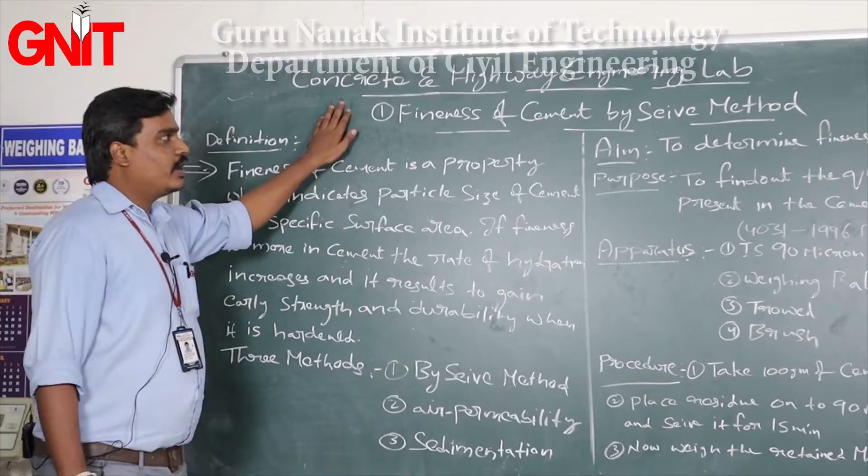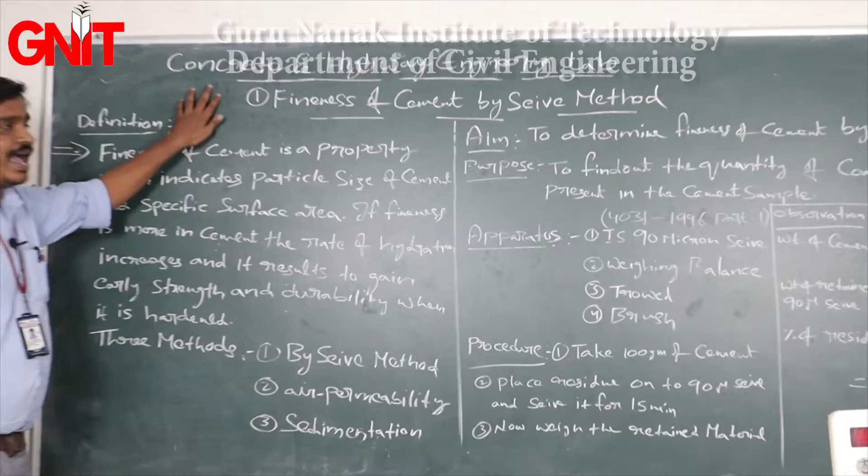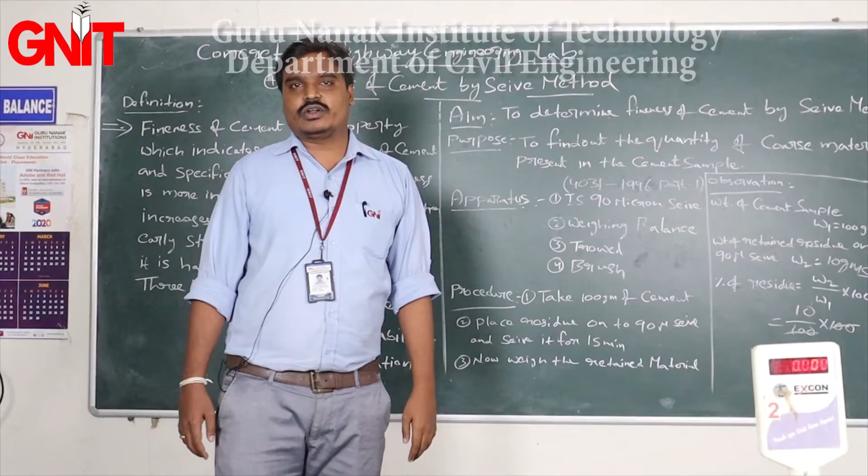Concrete and Highway Engineering Lab gives information about how to find the quality of materials. The building materials are nothing but cement, sand and coarse aggregate. If the properties of the building materials satisfy Indian standards, then those materials can be used in different construction fields.

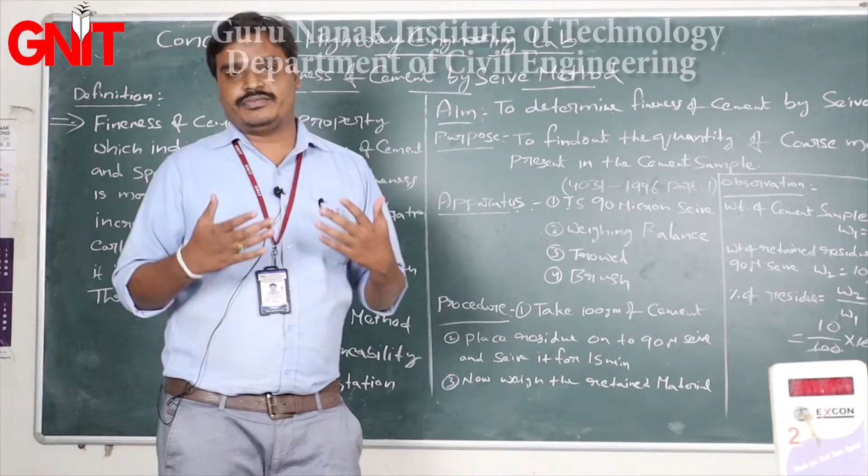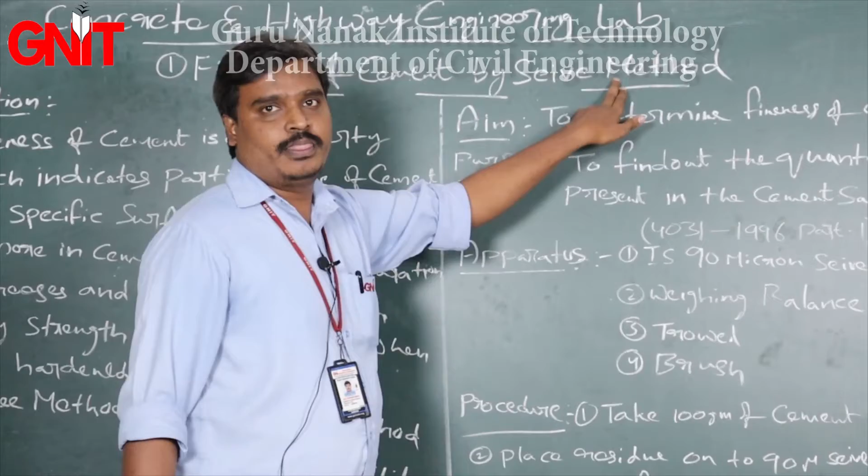Today in this demonstration, I would like to give information about how to determine the fineness of cement using the sieve method. Before starting the procedure, first we need to know what is meant by fineness of the cement.

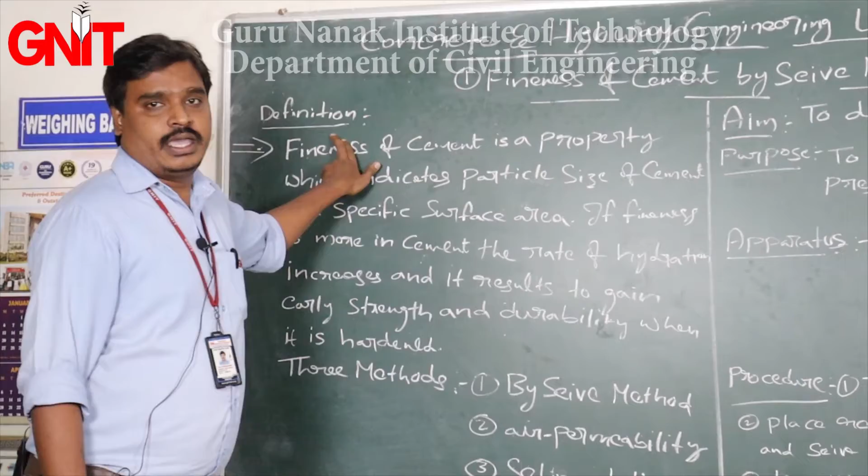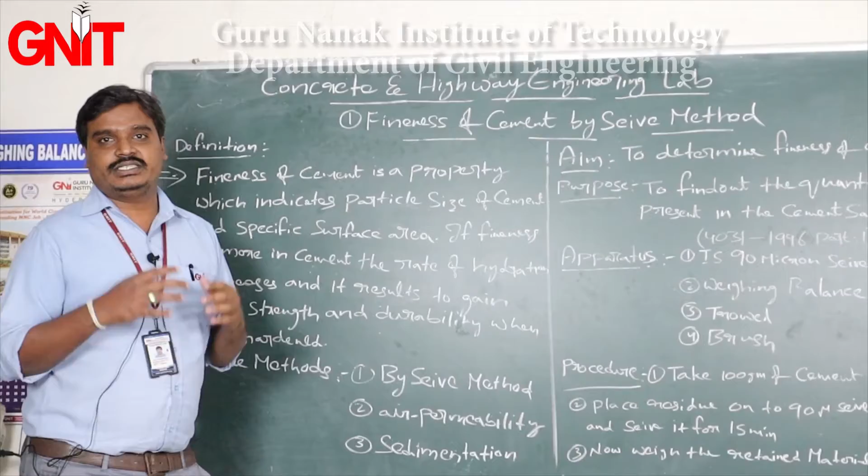Fineness of the cement is a property of the cement which indicates the particle size of the cement. It is expressed in terms of specific surface area of cement. It affects the hydration of the cement, giving early strength, and it decreases the bleeding of the cement when the fineness of the cement is high.

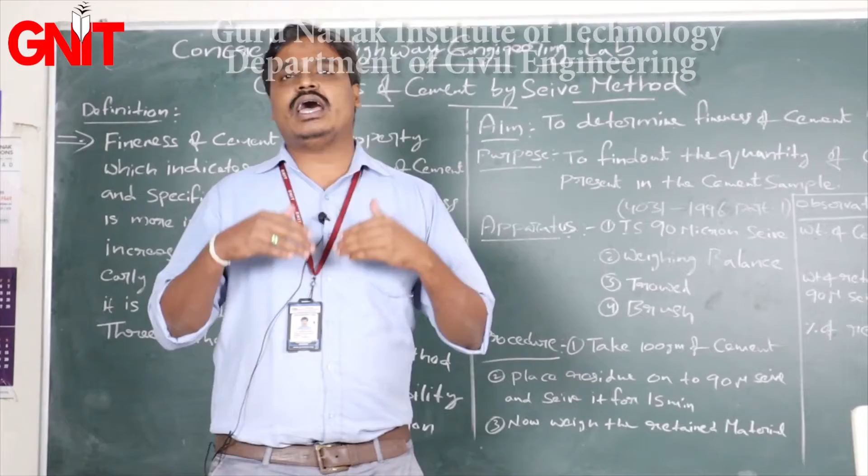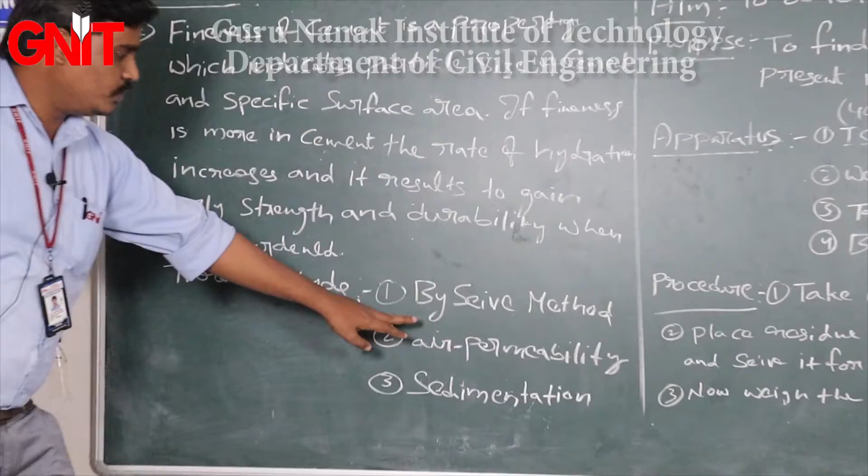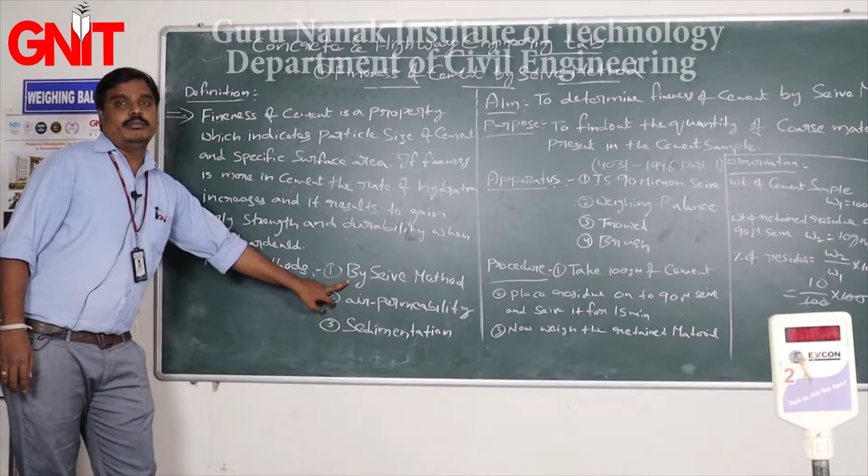According to Indian standards, to define fineness of the cement we have three different methods: the first is the sieve method, the second is the air permeability method, and the third is the sedimentation method. By using the sieve method we can determine the fineness of the cement. By using air permeability and sedimentation methods, we can determine the specific surface area of the cement.

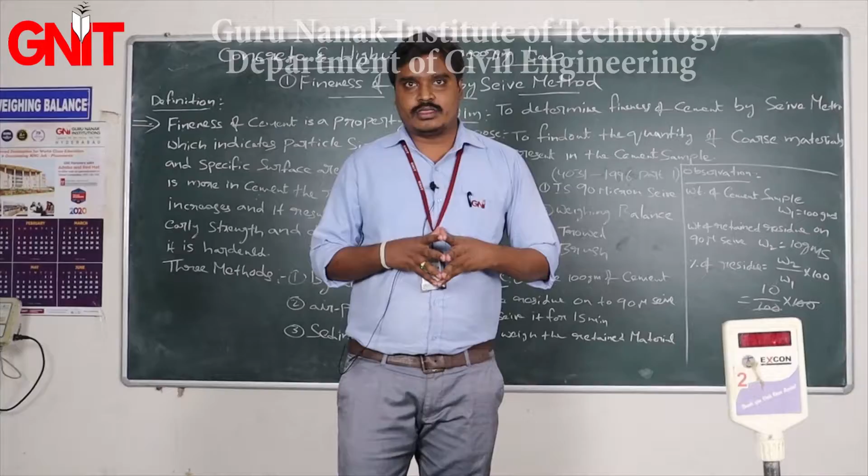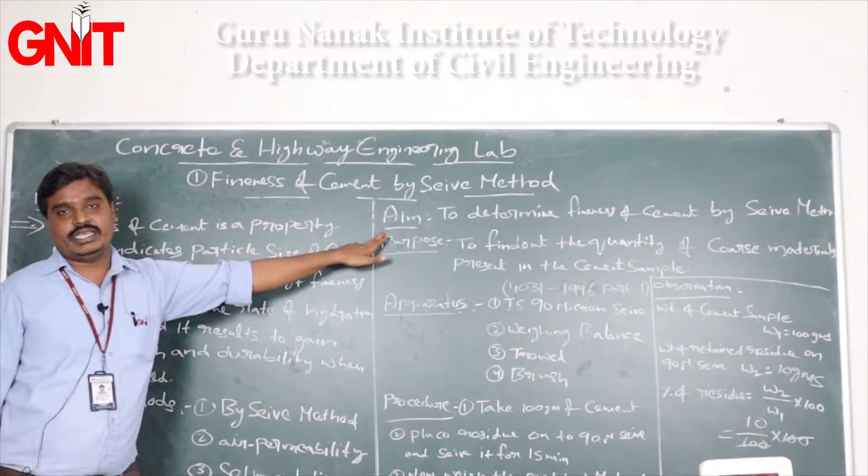In this present lecture, I would like to give information about how to determine the fineness of the cement using the sieve method. Now coming to the aim of this test: we are going to determine the fineness of the cement by using the sieve method.

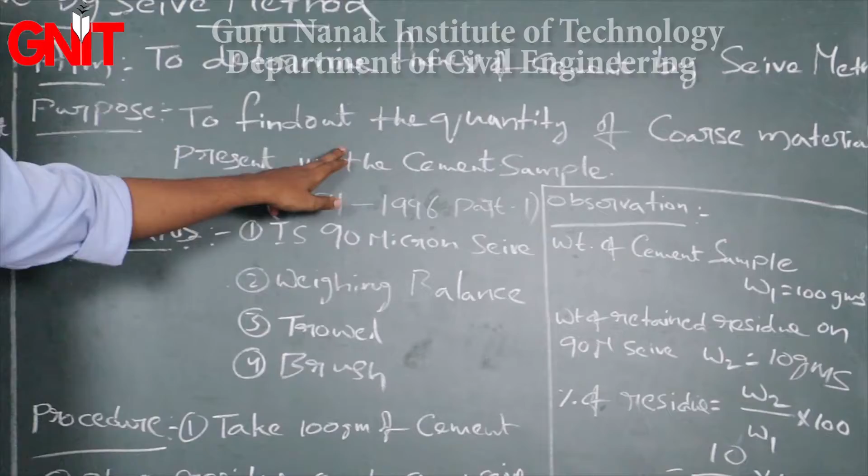What is the main purpose of doing this test? To find out the quantity of the coarse material which is present in the cement sample. Here we are going to find the coarse material which is present in the cement sample.

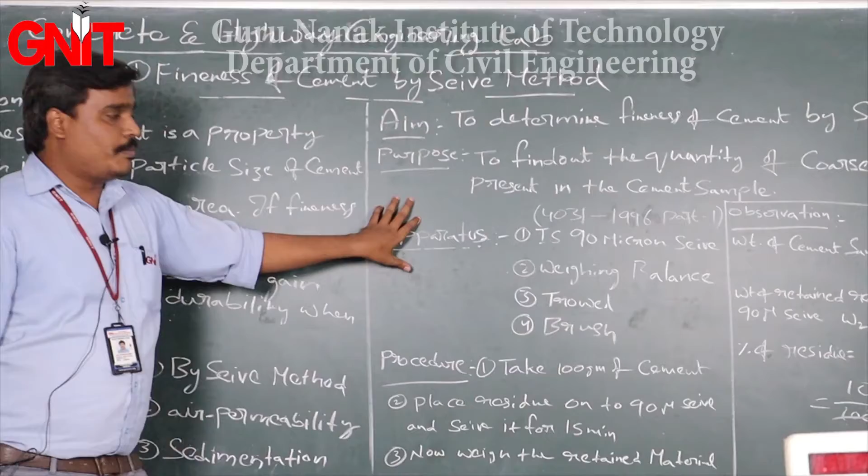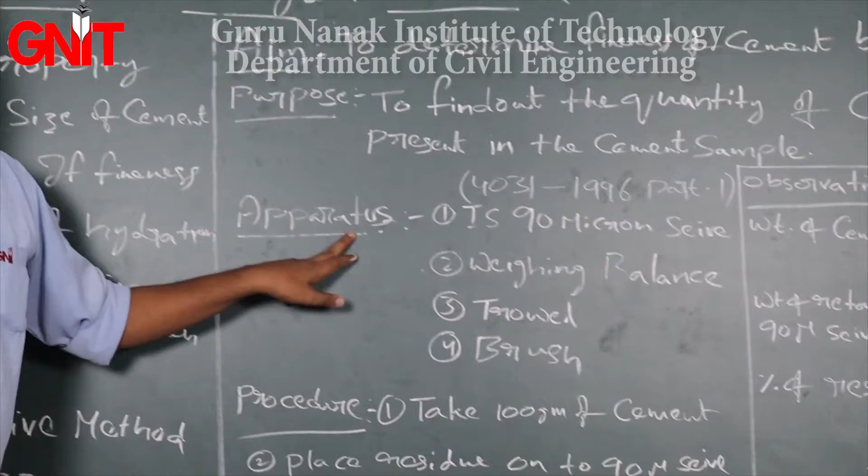Some of the apparatus used to find this fineness of cement, as per reference Indian Standard 4031 1996 Part 1: we need an Indian Standard 90 micron sieve, a weighing balance, and a trowel as well as a brush.

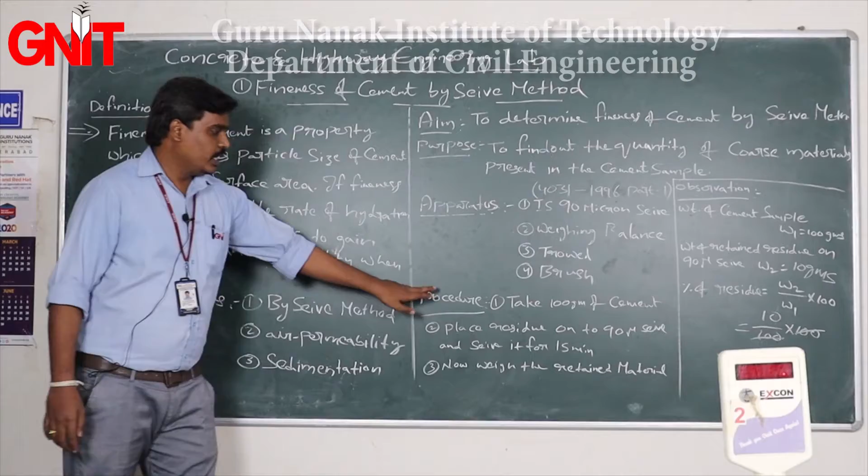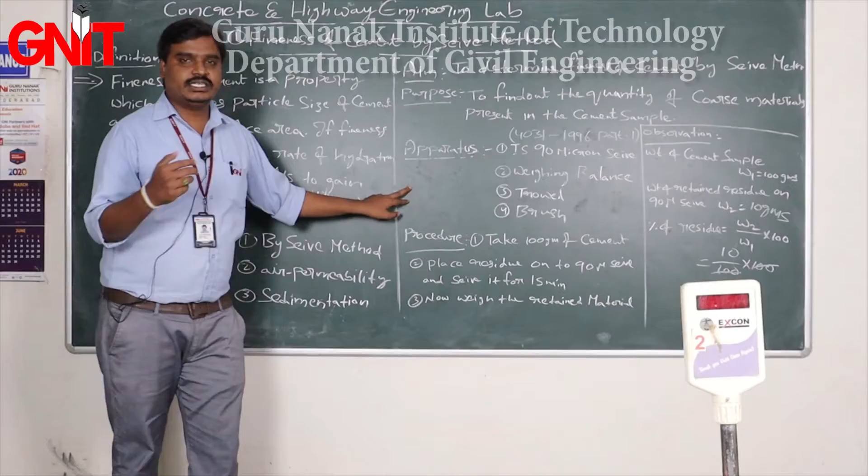Coming to the procedure: first we need to take 100 grams of cement. You can take any different grade of cement like OPC 33, OPC 43, OPC 53 according to availability. In this present procedure, I am taking OPC 53 grade cement.

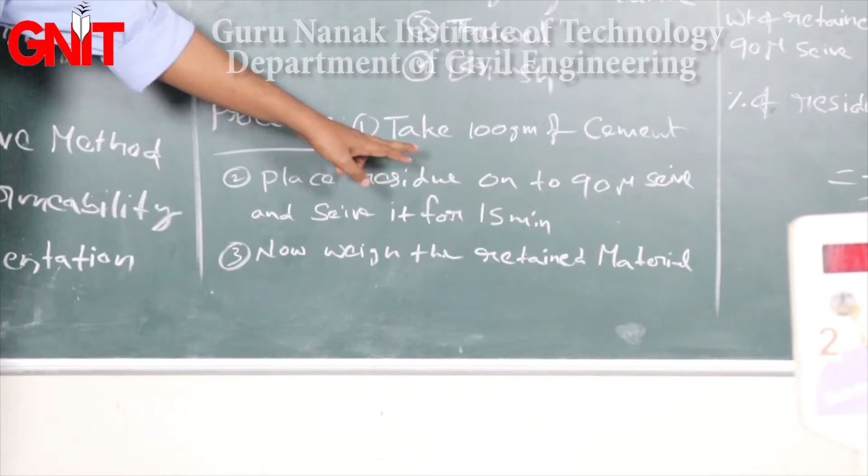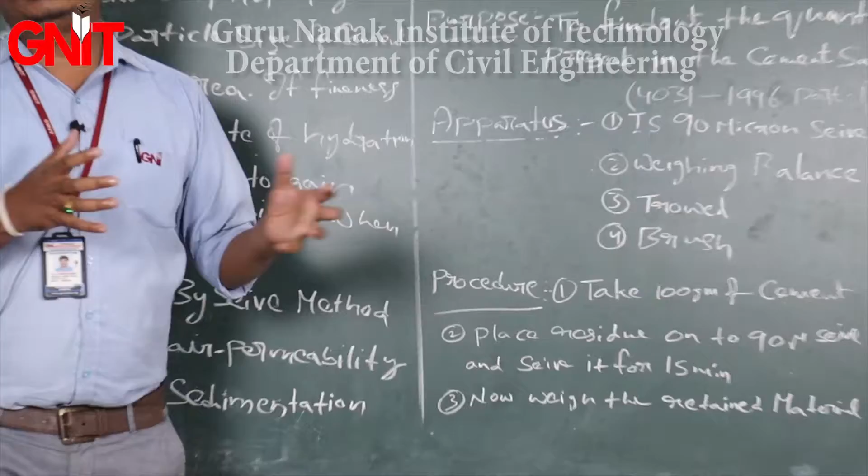After taking 100 grams of cement, that cement should be placed onto the 90 micron sieve. After placing the cement onto the 90 micron sieve, we need to sieve the cement for at least 15 minutes.

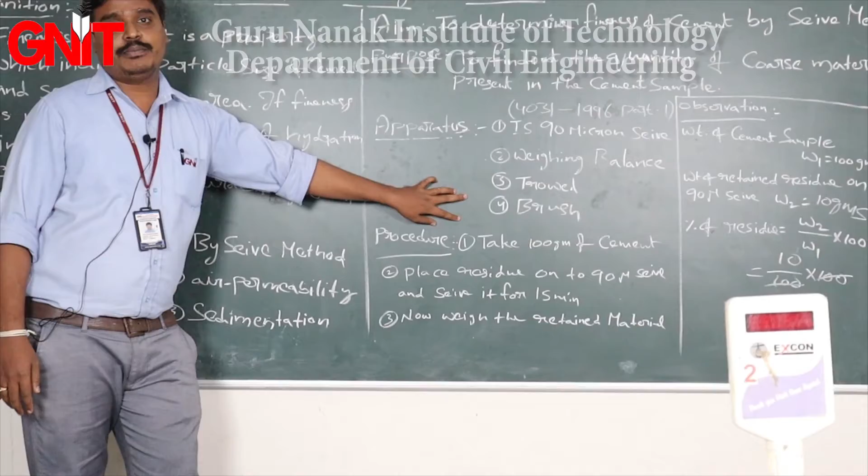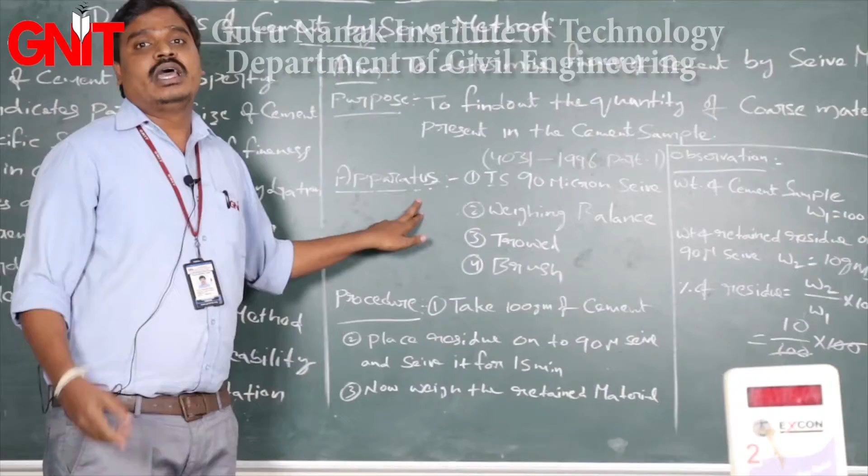After completion of the time period, you can see some changes in the sieve. When the cement particle is greater than 90 microns, that cement will be retained on the 90 micron sieve. If the cement particle is less than 90 microns, it will pass through the 90 micron sieve.

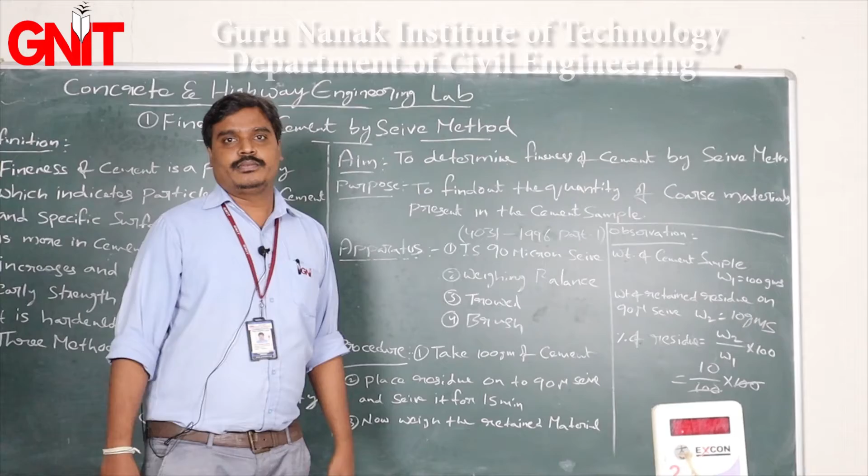Now whatever residue is retained on the 90 micron sieve should be weighed. Then we can calculate the percentage of the coarse retained material.

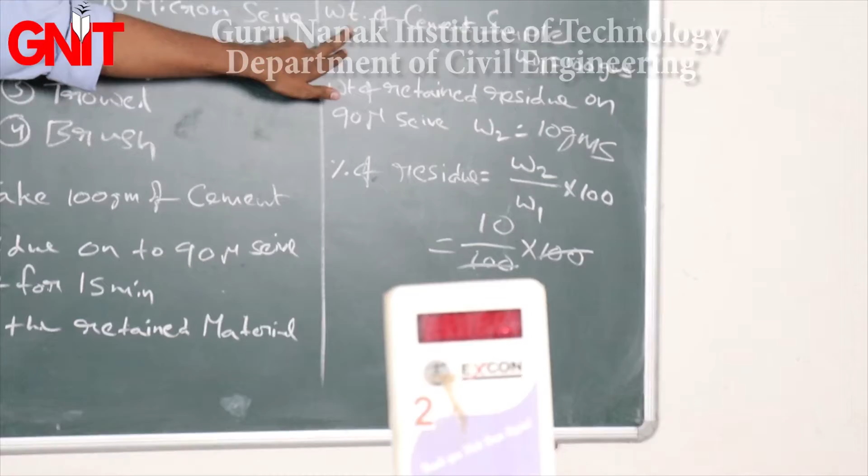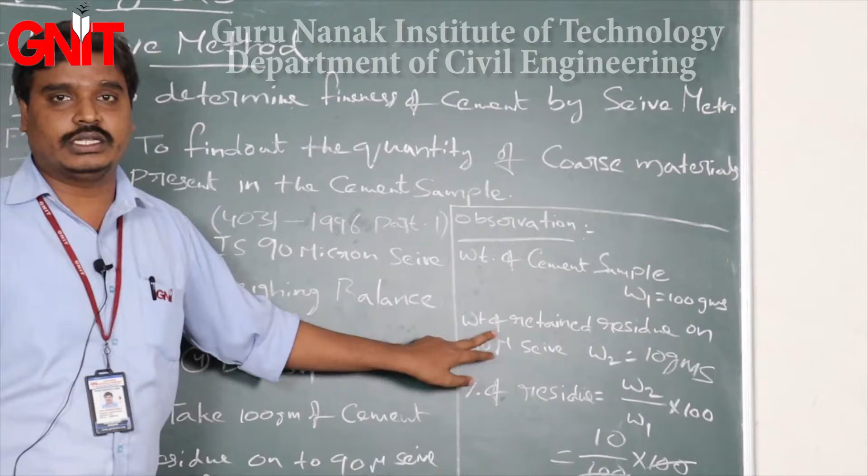Coming to the calculation part, initially we are taking some amount of the cement weight. The weight of the cement sample is 100 grams, which we are naming as W1. Next, after sieving, whatever residue is retained on the 90 micron sieve will be named W2. Here I got some value.

When we go to the practical exposure of the experiment, then you can understand how to calculate the percentage of retained material. Now coming to the practical exposure.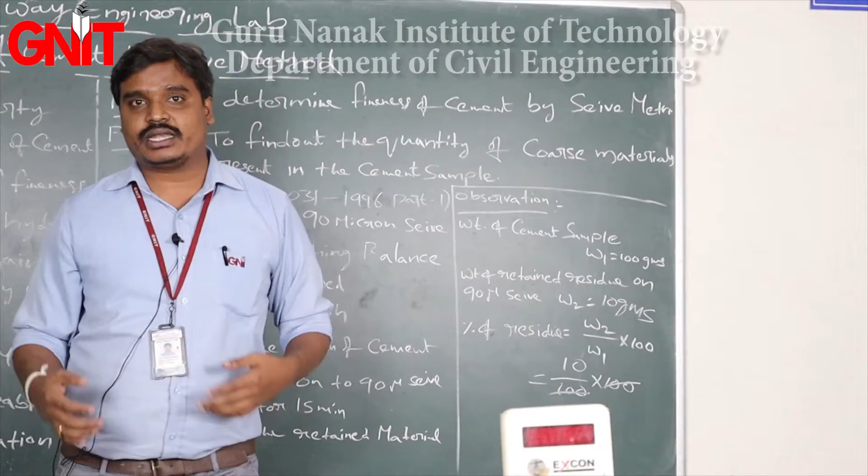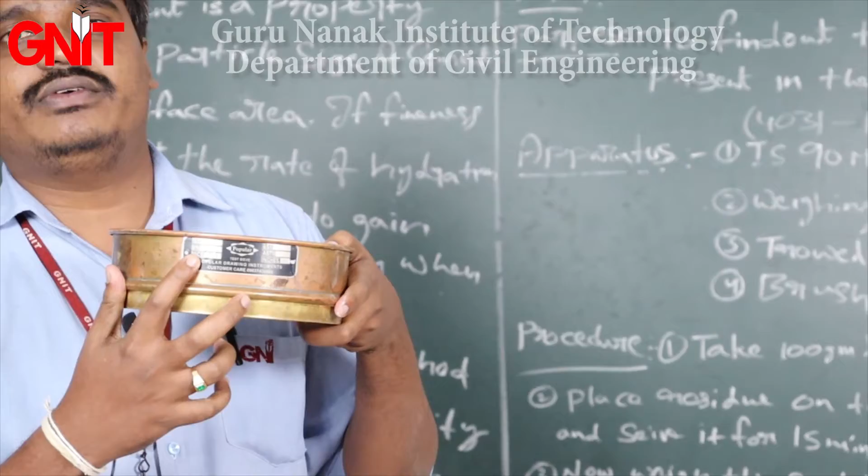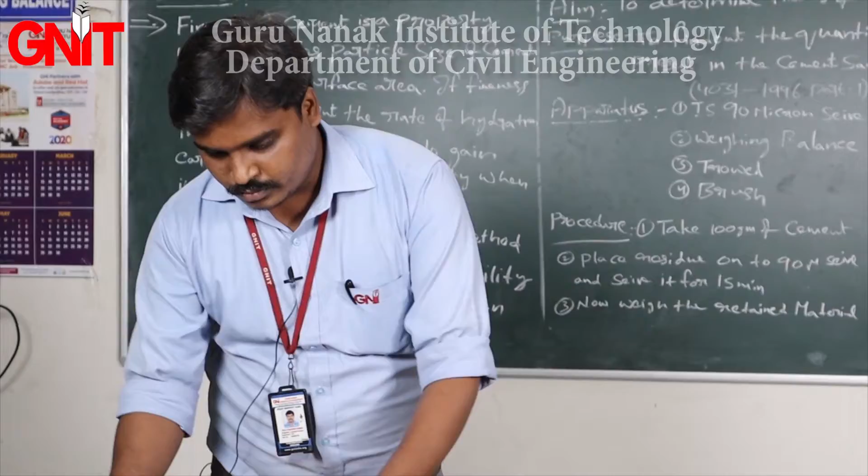This is the 90 micron sieve as a reference with IS 4031 1996 Part 1. Here you can observe the sieve number, sieve number 9, the size of the sieve is 90 micron. This is the top lid, and this is the collecting pan. These are the trowels. This is the weighing balance.

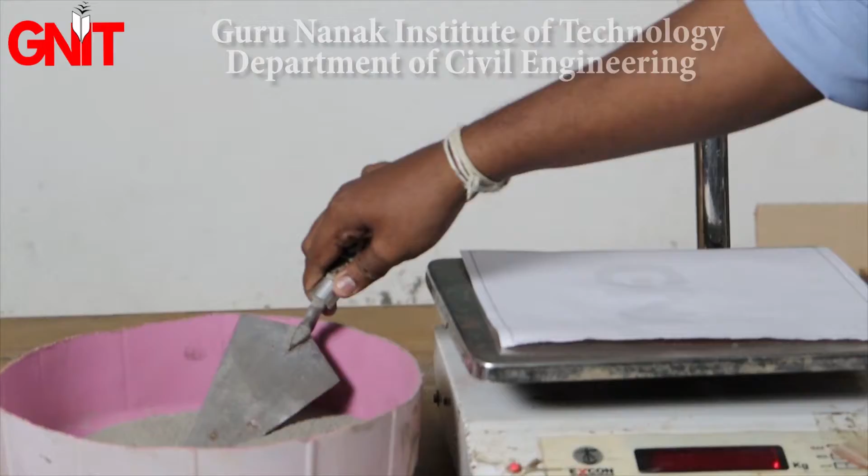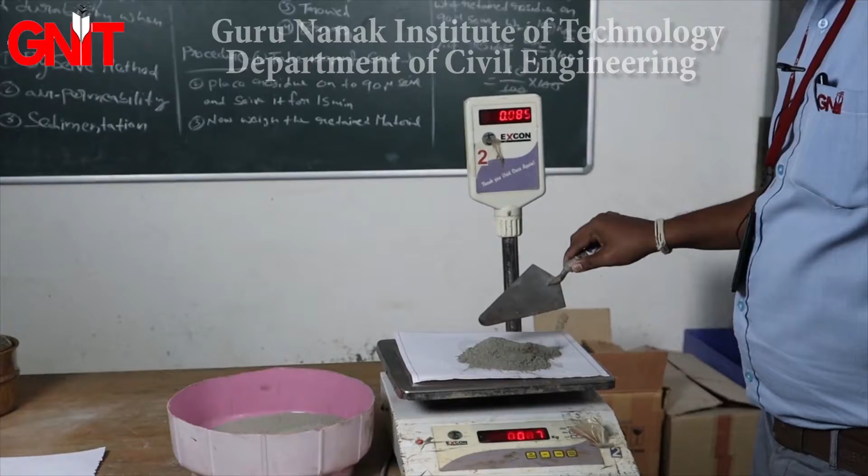Now coming to the procedure, how to determine the fineness of cement: first we need to take 100 grams of cement. Let's take 100 grams of cement. Here you can observe the value is, the weight of the cement is 100 grams.

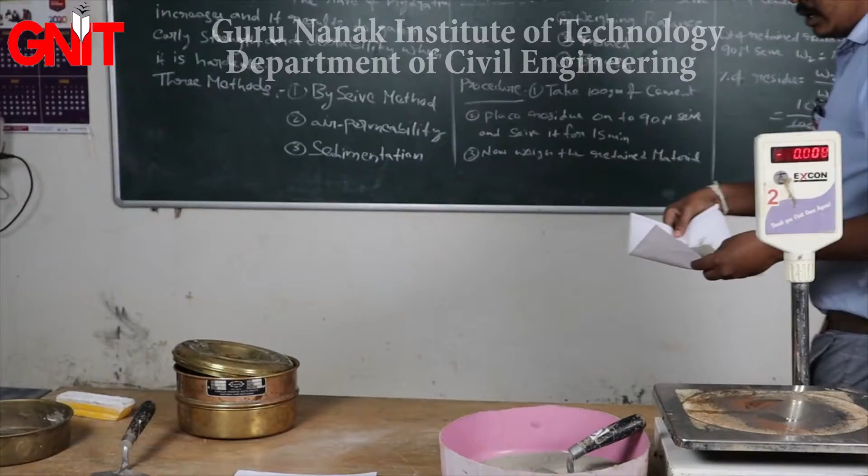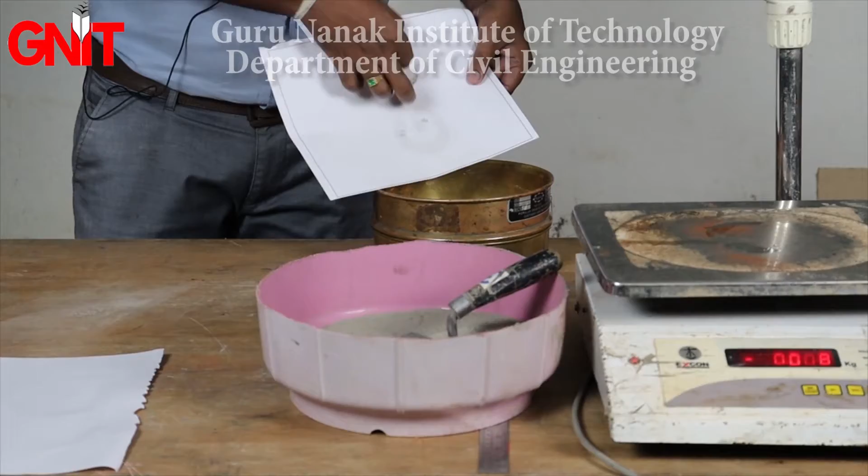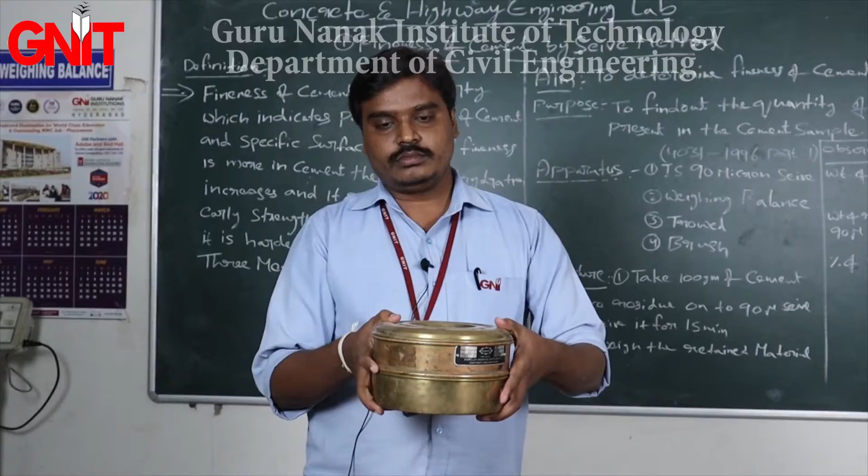Now after taking the 100 grams of cement, this cement should be placed onto the 90 micron sieve. Here you can observe the cement. Now close with the lid. Sieve it for 15 minutes. It should be sieved in a circular motion like this.

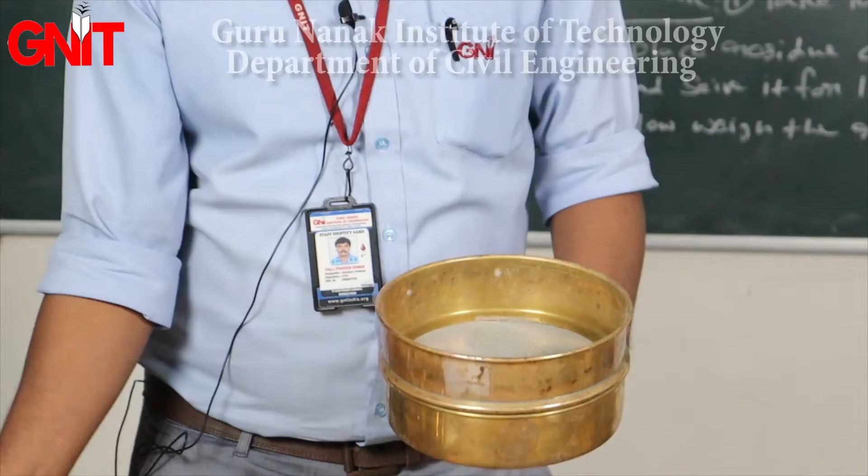Now after completion of the time period, you can stop the sieving. Open the lid and you can observe some changes in the procedure. Now see the changes.

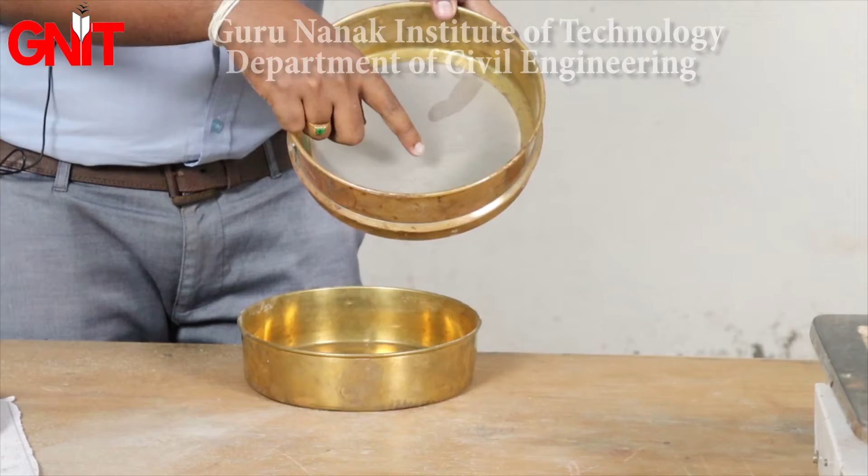If the cement particles are greater than 90 micron, those particles will be retained on the 90 micron sieve. Here you can see some amount of cement particles are retained on the 90 micron sieve. Those will be named as coarse material.

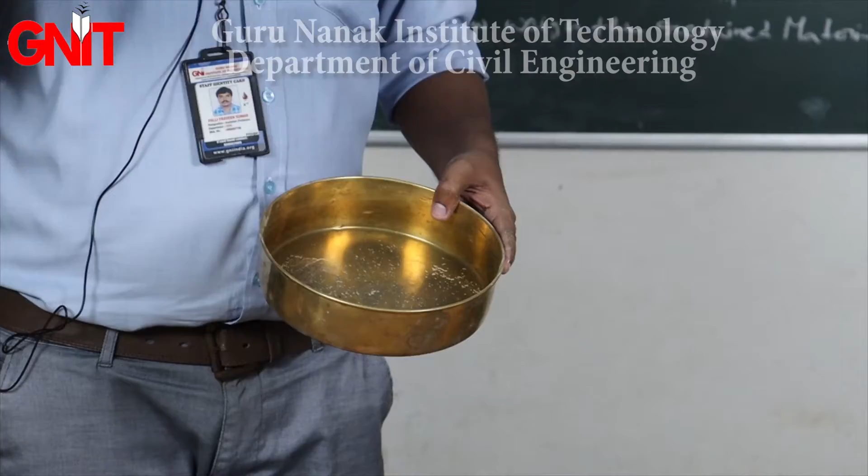If the cement particles are less than 90 micron, they will pass through the 90 micron sieve and we can collect them through the collecting pan. Here you can observe this material will be named as fine material. Now we need to weigh the residue which is retained on the 90 micron sieve.

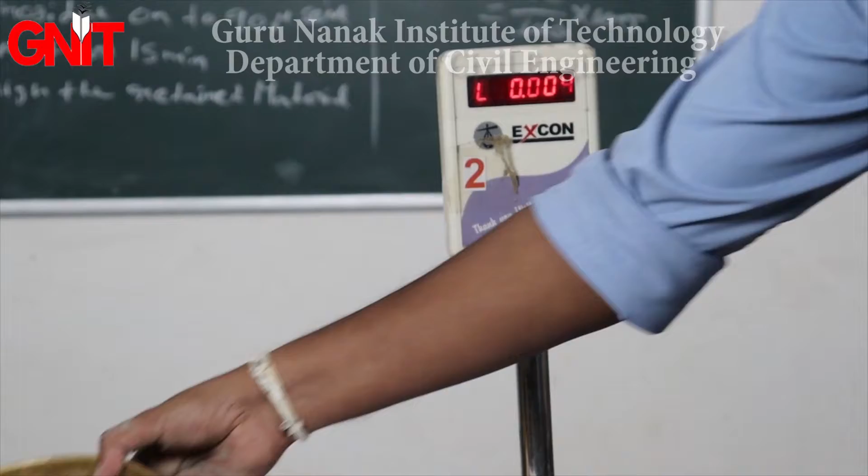Now we need to weigh the weight of the residue which is retained on the 90 micron sieve. Here you can observe, first make it zero. Now take the weight of the residue. Here you can observe the reading as 4 grams.

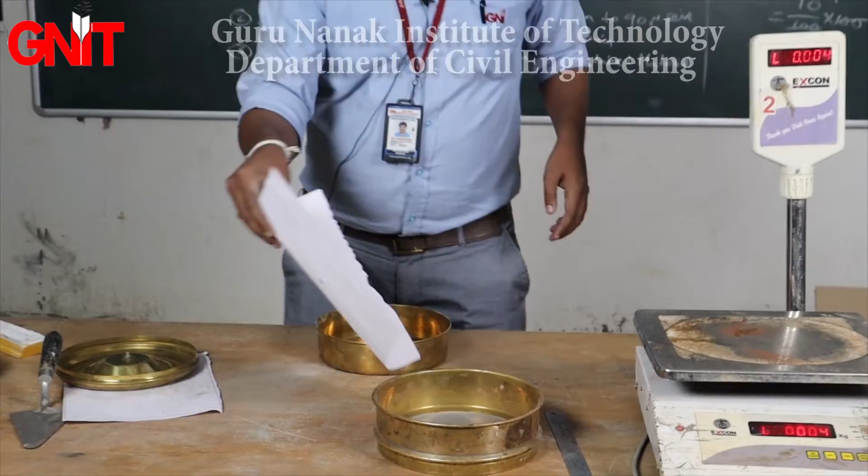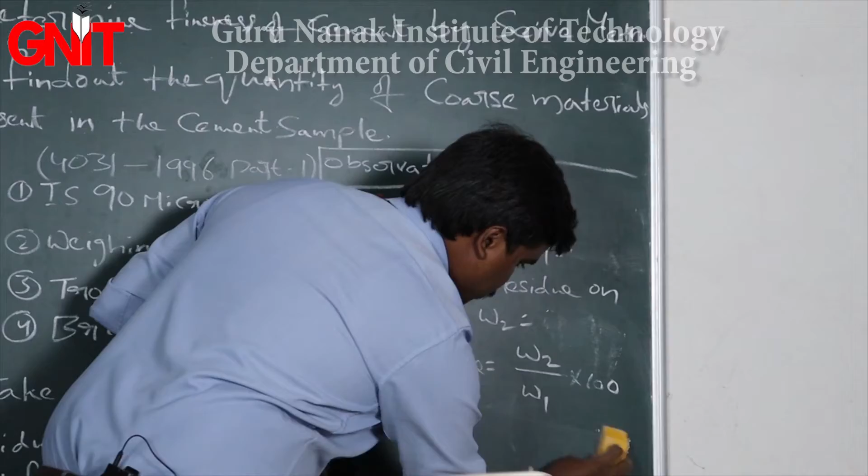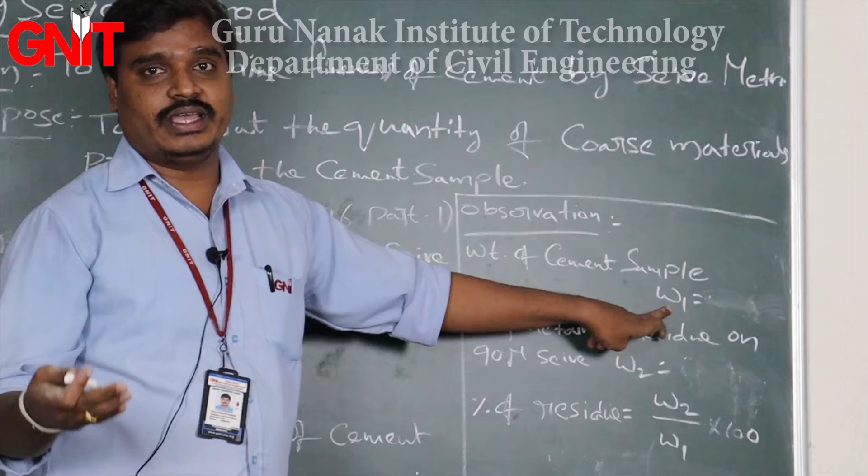Now coming to the calculation part: weight of the cement sample, W1, is initially whatever sample we have taken, which is 100 grams. Next, weight of the retained residue on 90 micron sieve after sieving, we got the value as 4 grams.

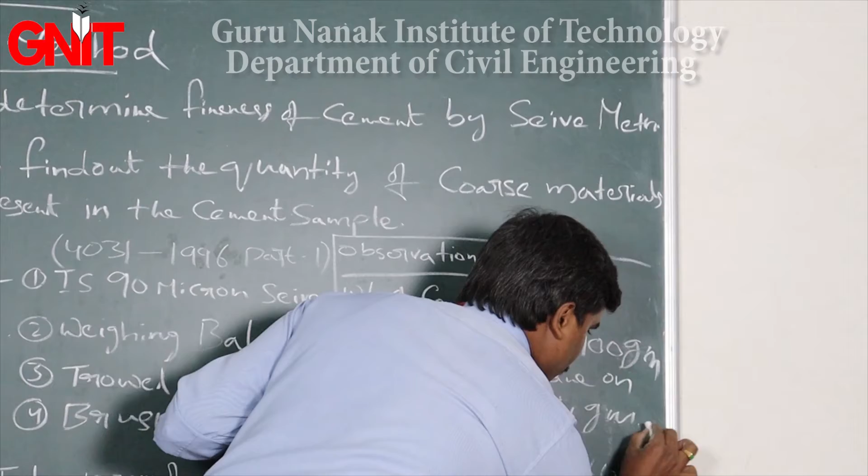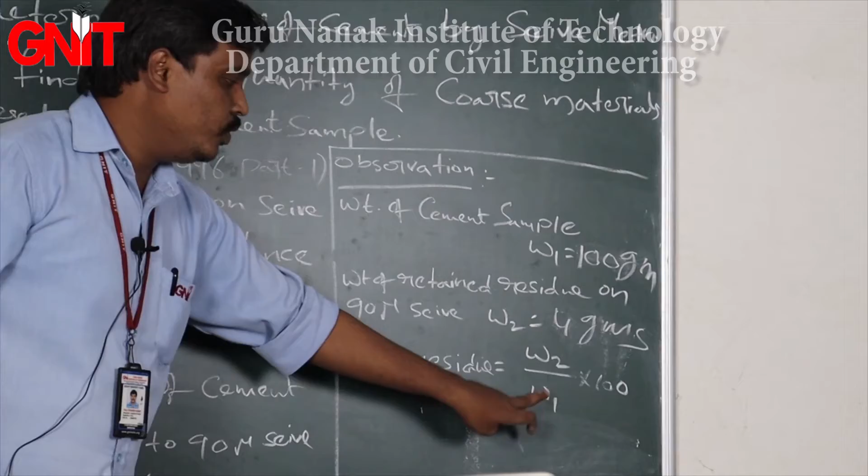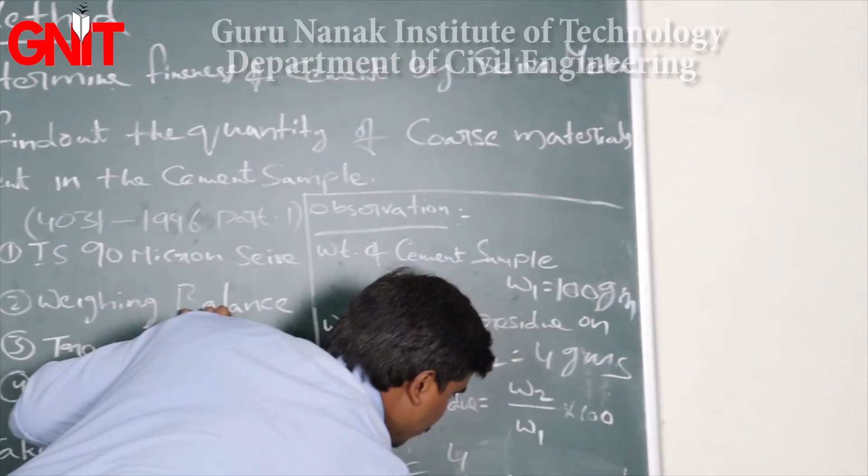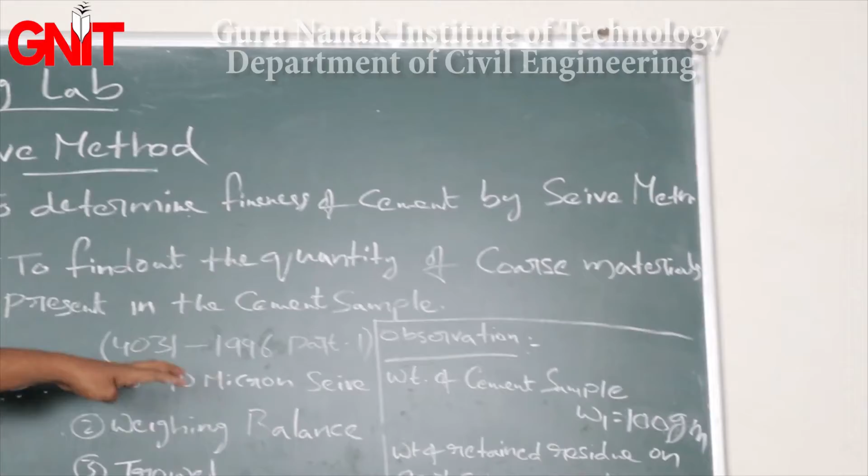Now we need to calculate the percentage of the coarse material, or the percentage of the residue. The formula is W2 by W1 into 100. What is the W2 value? 4 grams divided by W1, which is 100 grams, into 100. 100 gets cancelled and the percentage is 4.

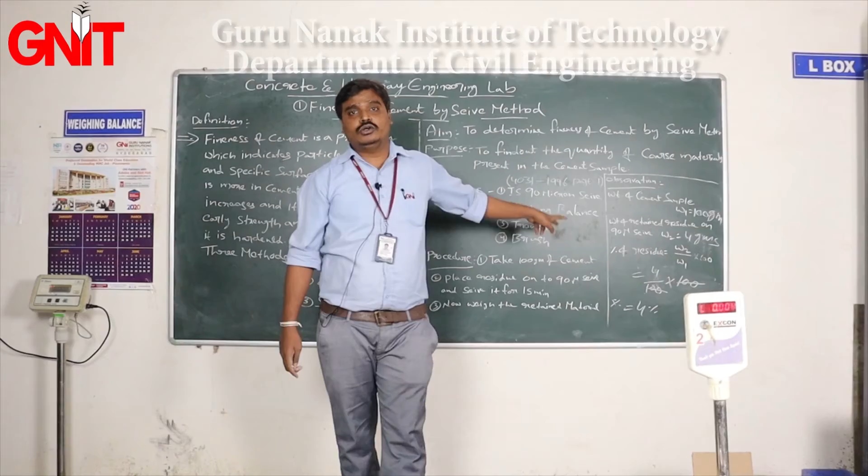Now the percentage of coarse material present in the cement sample is 4%. According to Indian standard, the percentage of coarse material should not exceed 10%. In this case, the result is satisfied, hence this cement can be used in building construction. This is the procedure for how we determine the fineness of cement by using the sieve method. Thank you.